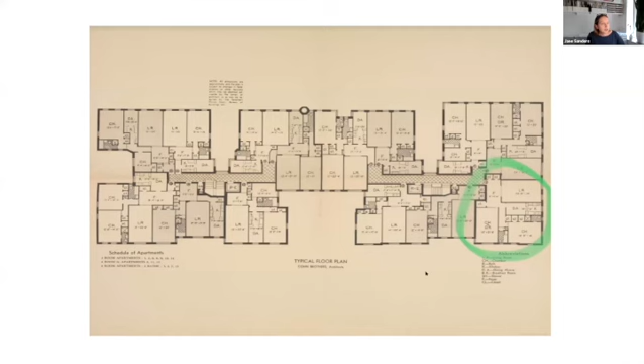This is the plan of the building, and this is the unit in the corner, circled in green here. This is the existing and proposed floor plan. The typical pre-war apartments have large bedrooms and living rooms, but very separate kitchen areas. It was a 2-bedroom, and my clients wanted to fit in 3 bedrooms plus a flexible office space. So it was fitting a lot into a small footprint of 1,300 square feet, but we made it very efficient with a more open layout and a more open kitchen. It was important to keep views through to these 2 nice street trees, shown in green on the plan.

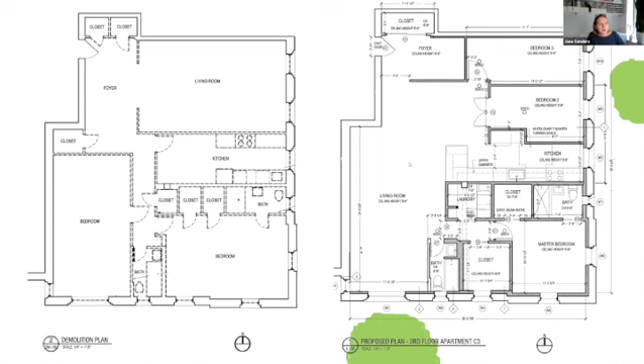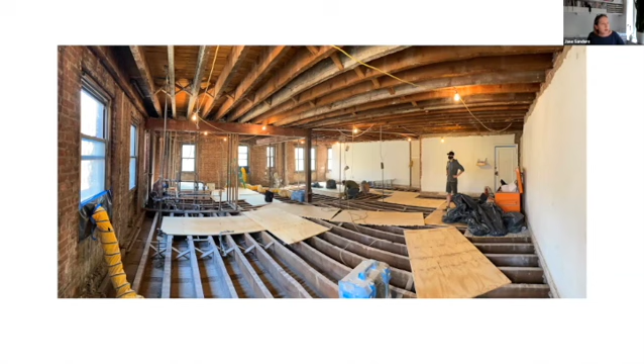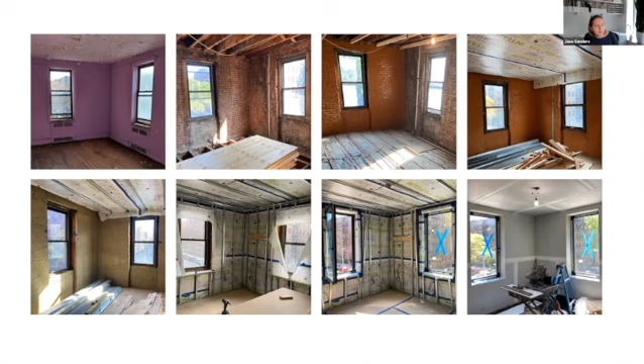Then we have a liquid applied air barrier on the brick and Intello membrane at the ceiling. We did 3 inches of continuous rock wool insulation over the brick, then an Intello membrane, which is a vapor variable membrane, then a 1 5/8 inch service cavity, which we filled with additional rock wool. This is after our windows are installed — triple glazed tilt and turn windows from Icon Windows, aluminum. And this is after the sheetrock was up.

So this is my main wall assembly. The main one was 3 inches of rock wool plus 1 5/8 plus 1/2 inch sheetrock, but there were a few spots where we were really tight on space where we used 1.5 inches of polyiso unfaced instead of the 3 inches of rock wool, and then a few detailed spots where we only did the polyiso.

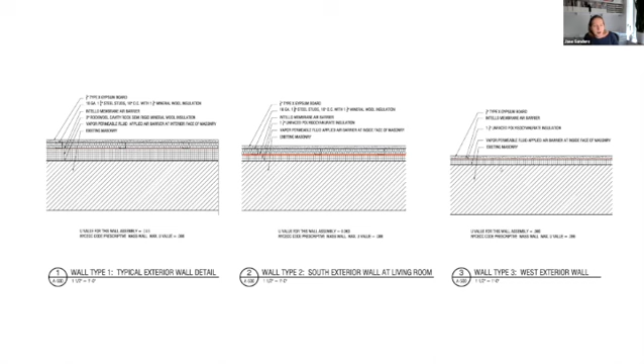Just a few details: we did polyiso at the corners to avoid thermal bridging at the party walls, we insulated the ends of the steel beams to avoid some thermal bridging there, and then just taping all of the plumbing penetrations.

At the neighbors' walls, we just did the liquid applied air barrier over the existing plaster, and there were some tricky taping conditions around the beams.

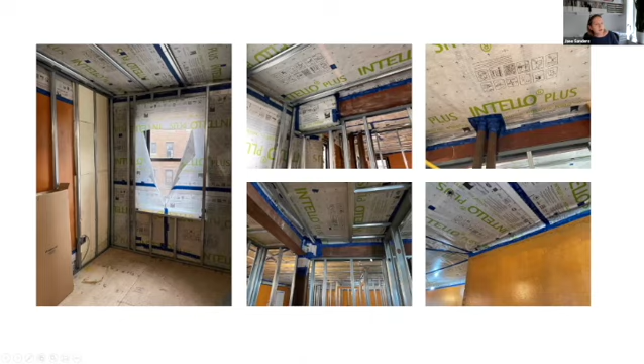So this is just showing the floor and ceiling where we insulated, and we were able to get a lot of these buildings have, when they have a concrete slab, you get a big thermal bridge there, but here, because it was wood framing, we're able to get pretty good insulation all the way around.

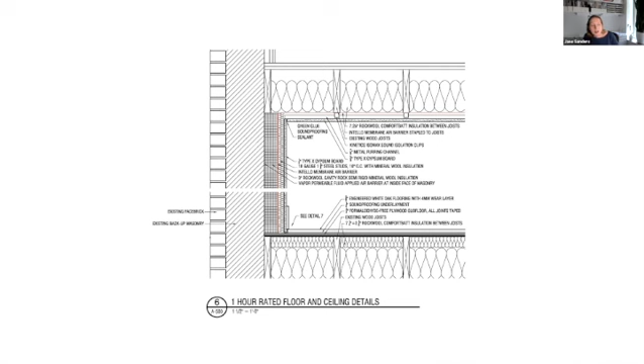And we also did a lot of soundproofing. We did a soundproofing underlayment at the floor and also sound isolation clips at the ceiling. So that combined with the air sealing and the insulation, the apartment is really quiet. The neighbors below even noticed it during construction, like once that was installed, how much quieter it was with the construction noise.

So the HVAC system is the Minotair unit, which is a combined heating, cooling, and ventilation system. The great thing about it for this type of project is no outdoor unit is needed. We just had to create 2 penetrations on the building.

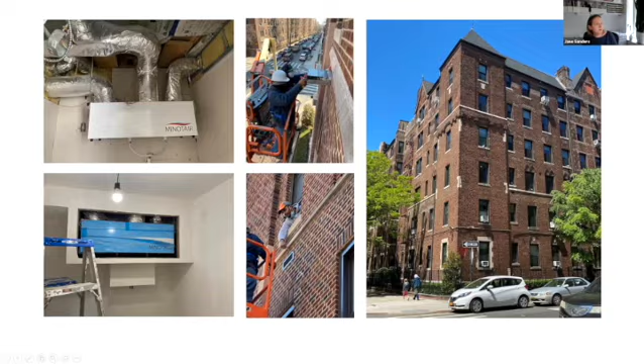So here's the HVAC plan. You can see the intake and the exhaust coming, and then the unit—we were able to locate it over a closet, and most of the ductwork over the laundry room, because the ceilings are not particularly high in this apartment. We really wanted to keep everything from lowering the ceiling, so we were able to centralize it and just have a few soffits. We ran it up between the joists above the kitchen.

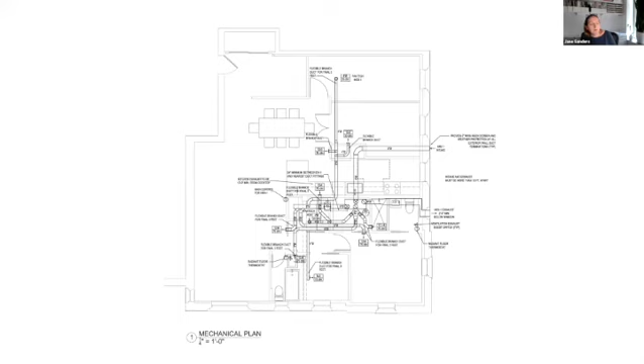The great thing about this system is you're basically compartmentalizing the apartment, and because you're sealed off from the neighbors and you have your own fresh filtered air, you avoid the transfer of smells and bugs and everything else.

Most of these pre-war type buildings have no mechanical ventilation whatsoever. To start out, the kitchens and bathrooms had windows, so there was really no ventilation previously other than opening a window. So in addition to the soundproofing, with more people working from home, the air quality is really a huge advantage to doing this.

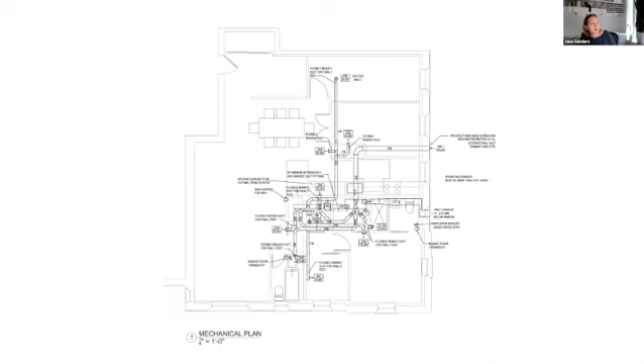And the typical windows on the building have aluminum panning like a brick mold, and I put insulation inside of the panning as well so that the frame was insulated over the top of the frame. And then at the lintel, we used a little bit of aerogel batt insulation, because this is a real narrow point. You want to connect your interior insulation with the window, so that connection was pretty important.

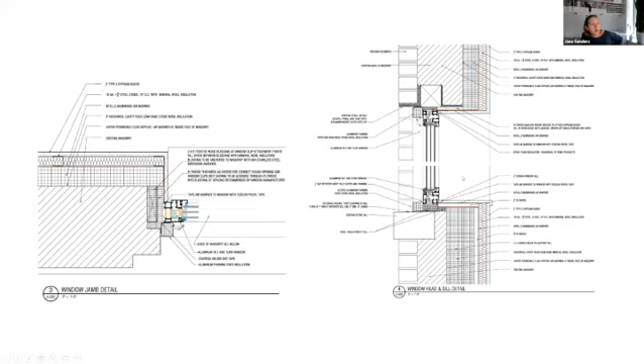So here's showing we used the pressure treated wood blocking that was wrapped with waterproofing at the points of the clip attachments, and we cut those back later. And then we used some rigid insulation under the sill, but we used some little blocks of a Partel product that's a more dense product. We also used the Partel product for attaching the finishes, places where we need to screw in later—we used that instead of wood blocking. And then we used some waterproofing at the sill that was wrapped up later.

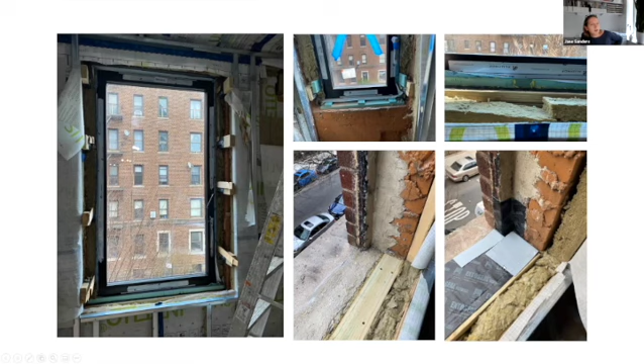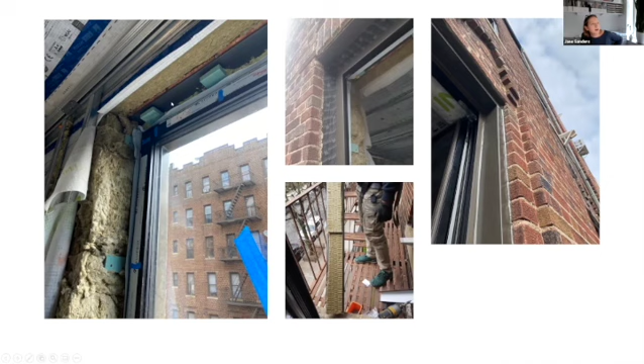This is showing how we insulated the panning, and here's the panning on the outside. The windows were taped to the interior air barrier on the inside, and also taped on the outside of the exterior brick. This shows the little blocks of the Partel product for attaching the finishes, and all the other space was filled in with mineral wool or aerogel batt.

So this was kind of a tricky corner. This was the existing window above, and you can see we replaced it with one large window to get a better view of that tree and better solar heat gain from the south in the winter. It's nicely shaded in the summer by that tree.

But to get this corner to work, we had to use a thinner wall assembly. That's where I used some of the polyiso, and only stepped it back a little bit here in the corner. We also insulated the wall intersecting with the neighbor to avoid some thermal bridging at the corner.

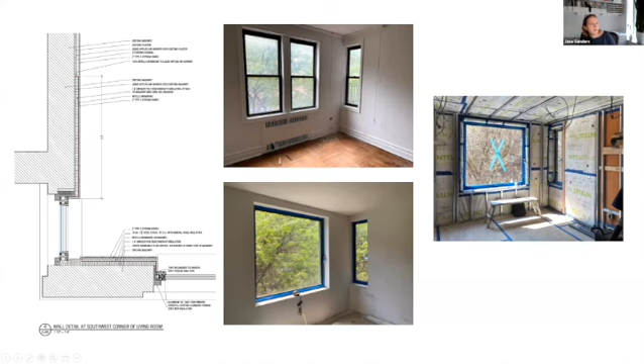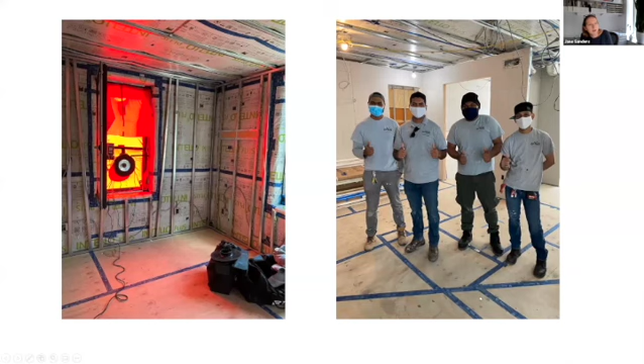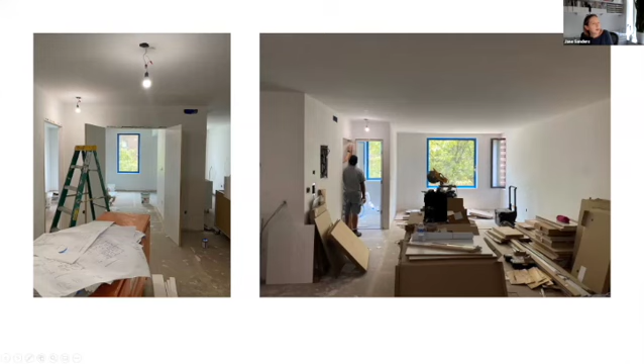So that's it. Just to summarize, a lot of the advantages are getting rid of the window AC units, getting off the steam heat, the air quality, and the soundproofing. In this particular building, the co-op owns a lot of the units that they rent out, so the idea is that this retrofit can serve as a model that can be repeated when the other units are vacated.

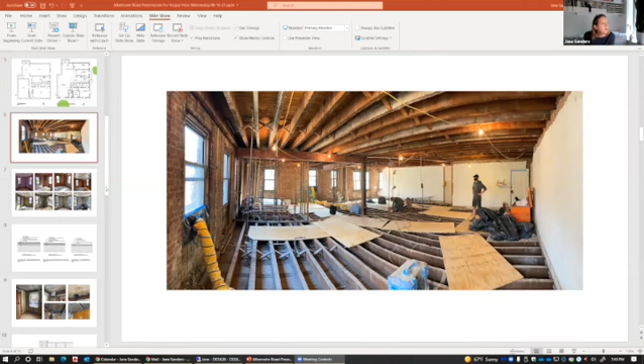Let me just go to that photo. I'm just going to share the screen again real quick. Can you guys see that again? Yeah, along here it was parallel, and then the joists actually changed direction, and they're parallel here as well. So I didn't have any joist ends intersecting the exterior wall. But even if I did, right, yeah, there were no joist ends here.

And Jane, from an air sealing perspective, all the joists are outside of your air barrier. Right, that's what I was just going to say, because here's our air barrier at the floor and then the Intello at the wall and at the ceiling. It's not really like it's not like a townhouse where you have that issue. Yeah, it's really this inside space here that's sealed, so.

Perfect, thank you so much for explaining that. Right, because at a townhouse, we would normally move this first joist inward so that we could have insulation there, and then all the party wall joists would have to be taped individually. Thanks.

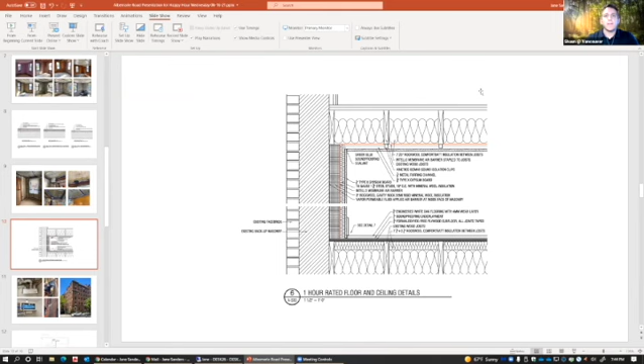Yeah, we're not really that familiar with the Minotair and systems like that. We don't really have them available in Oz at the moment. So a little while ago, the PHPP data for a Passivhaus Institute Passivhaus, the efficiencies weren't able to be used. Is that being rectified? And do you guys have PHPP data for the system?

Good, well hello to you, Scott. So can you tell me where you're located, just for me to have a better understanding of who I'm speaking with? Yeah, so I'm in Woolgoolga, Australia, which is about halfway between Brisbane and Sydney. Hello to friends of the Commonwealth.

So to answer your question, we are having active discussions with PHI because of the uniqueness of our unit, as we are using a heat pump based machine to capture the heat not only of the stale air, but also the heat of the moisture and also the work of the compressor. So three heat sources. We're doing active heat recovery, and PHPP is not designed, as we speak, to take that into consideration in a fair way.

Okay, so it's a bit more complicated than anticipated. I stay confident that in the upcoming months it will be resolved. I've got good confidence that we will find a way. So for now, no, we don't have a good way to show you in the PHPP how to correctly and fairly and logically include our units. Okay, but it's a question of time.

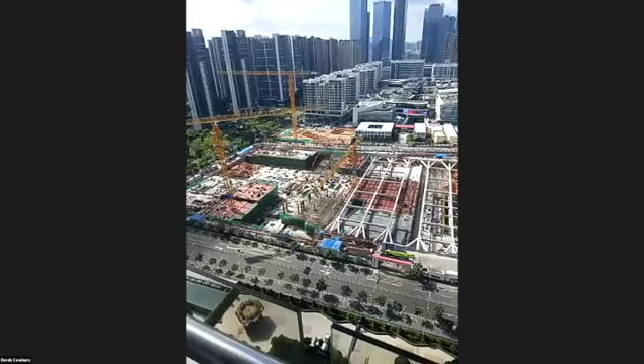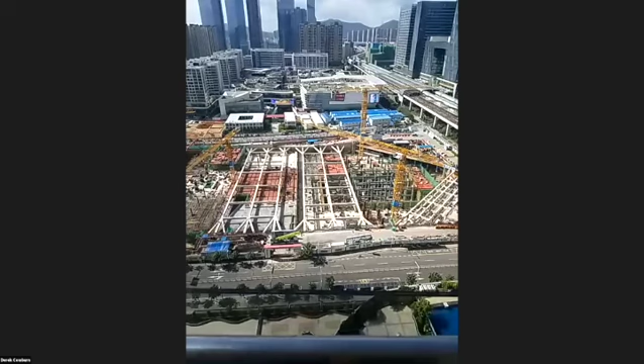Wow, it's so funny to say that China is going to have a library, given again, they don't want people to have knowledge. I just think that's kind of a bit of an accident where it's like, here's a library, but we're only giving you our books, we're not giving you any of the... They don't do that. And those cameras are for everyone's good, right? Yes, exactly, yeah.

COVID didn't occur in China. Yeah, that's what Derek's going with. Yeah, got kitties and dogs here. Sorry, I got my mini zoo. No worries, Derek. Okay, I gotta run guys, I'll catch you guys later.

It was cool seeing the two retrofits back to back and how they did things slightly different. Yeah, it was neat. Cool. Bye everybody, yeah, good night.